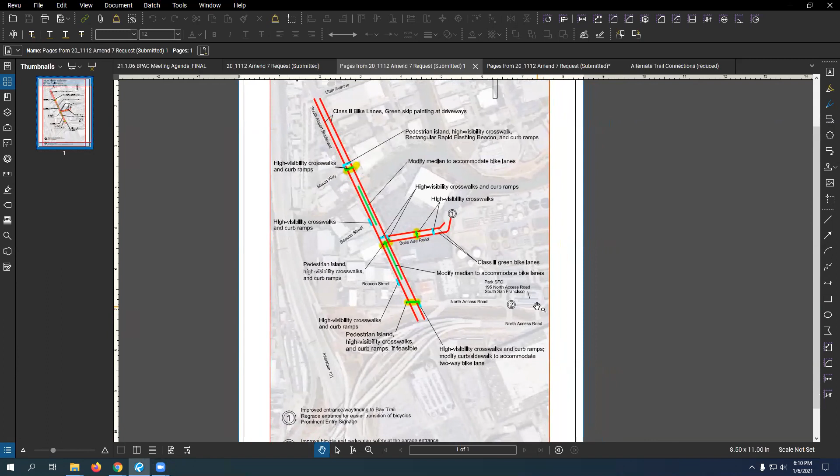The last project that I brought to BPAC was the North Access Road Bikeway project, and that was also part of that same BCDC permit. But this is the second phase of that BCDC permit where we're doing improvements along South Airport Boulevard.

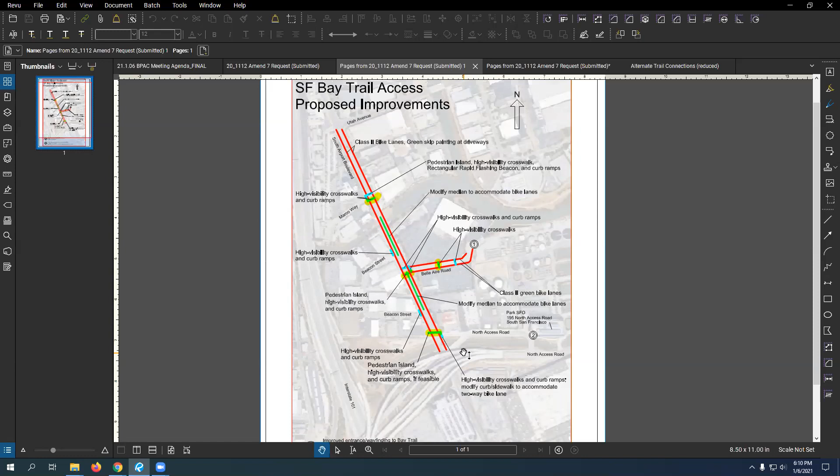I did bring these plans to BPAC previously, but BCDC wanted a formal letter from BPAC confirming that BPAC also agrees with the city's approach to the project. So I wanted to go over the letter BCDC sent us, and also a summary of what we were changing to the permit.

So the BCDC permit has a few improvements that they wanted to improve access from the city to the SF Bay Trail. That's really their goal, is to improve access to the SF Bay Trail, to get to the SF Bay Trail.

Here's my summary list, but just giving you an overview, here are the improvements that BCDC originally required the city to install. These dark red lines are bike lanes, and we've recently installed bike lanes on South Airport Boulevard, and Belle Aire already has bike lanes.

The other thing is, pretty much all the intersections, they wanted high visibility crosswalks, and maybe even new crosswalks. So there are a few locations where new crosswalks, the city didn't really think would be the safest idea to put in, or logical locations from our perspective that would still serve getting people to SF Bay Trail, either the one behind Costco or the one down by SFO, between SFO and the water treatment plant.

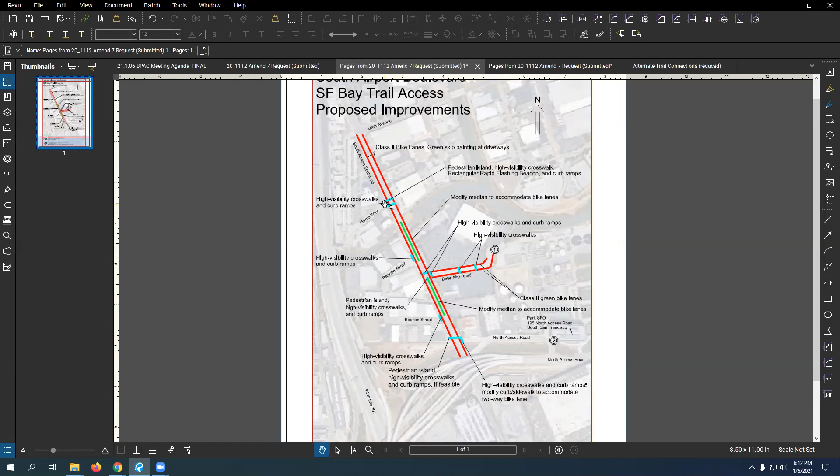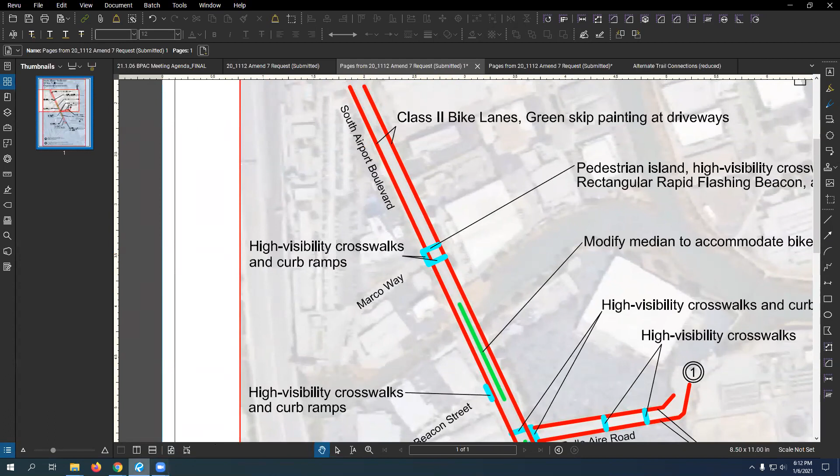So one of the ones we wanted to remove, starting from north to south, is at South Airport Boulevard and Marco Way. Right now there are 2 crosswalks there, and BCDC wants us to install 3.

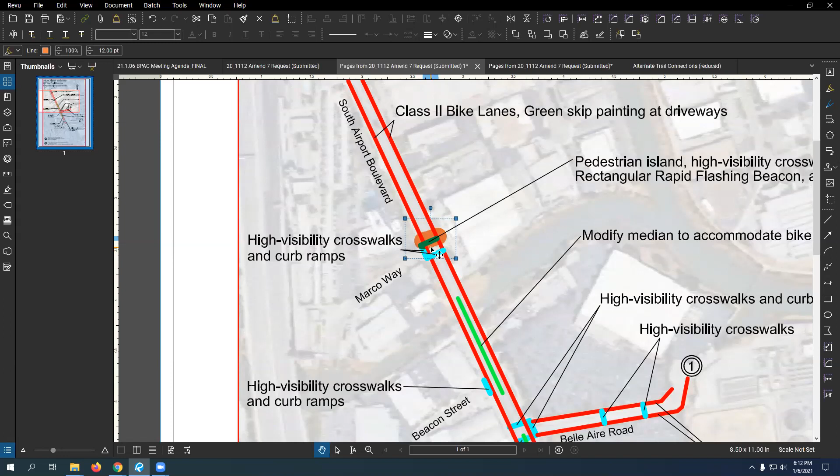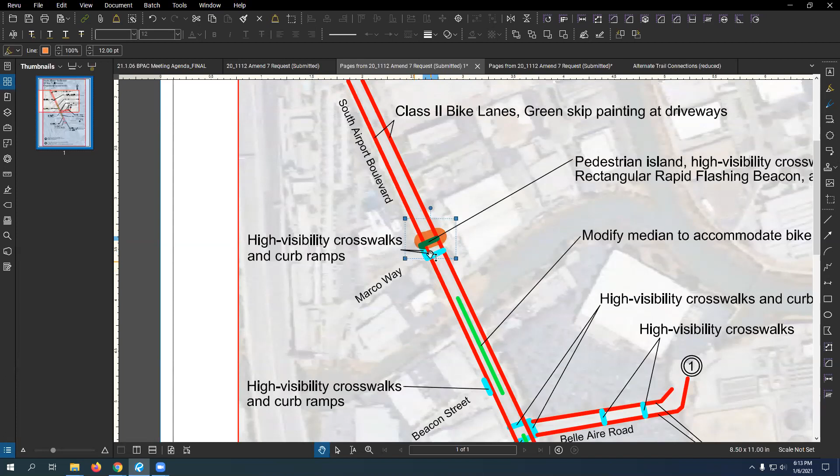Now, the reason the city doesn't want to install this top one is because it's an uncontrolled intersection, and drivers would have to worry about 2 places where pedestrians cross, and they can be distracted by more things. It's less safe for a pedestrian to cross when there are 2 uncontrolled crosswalks. I'm pretty sure everywhere else you've seen a mid-block crossing, there's always 1 crossing, not 2. So we've been trying to voice our opinion to BCDC that it's not very safe when you have 2 uncontrolled crosswalks right next to each other.

Now I'm going to show you what the plan looks like. So currently there's a crosswalk on Marco Way, and they just put in a high visibility crosswalk about last year on the South Airport Boulevard one. But what we're going to do...

Since we're not putting that crosswalk on the north anymore, we're going to put high visibility RRFBs, rectangular rapid flashing beacons, on either side. Right now it's just a crosswalk with regular signage, but this one will have the flashing beacons now. So that's the give and take with BCDC.

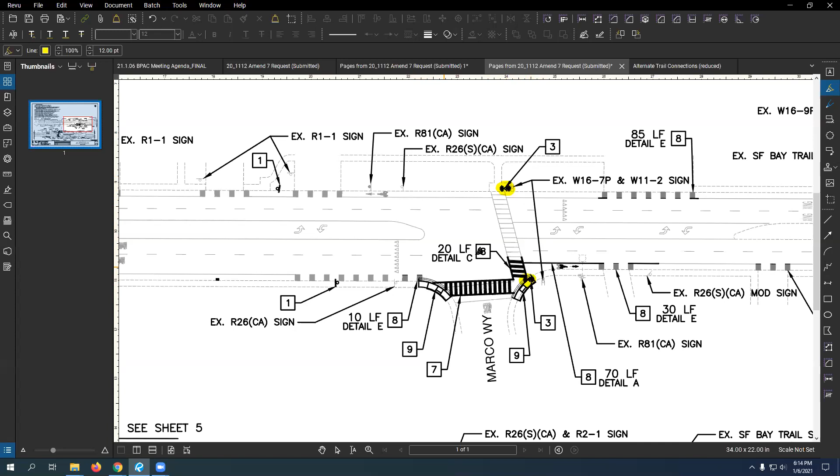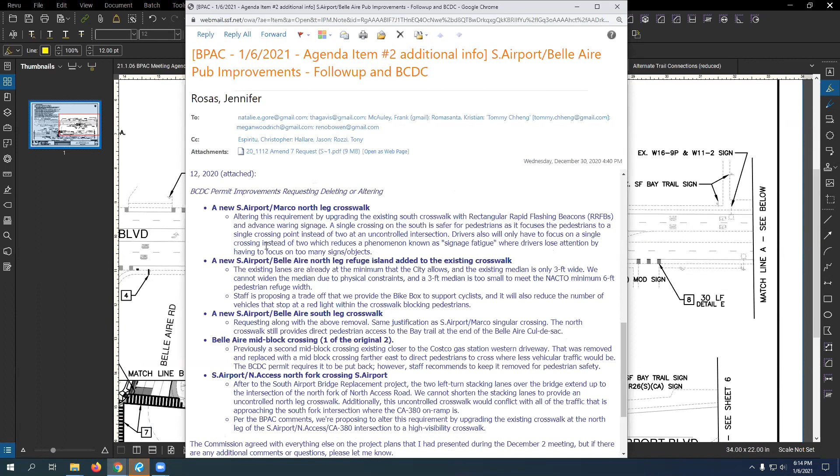The second one is we're going down to Belle Aire, where BCDC wants 3 legs of crosswalk at this intersection - a crosswalk on each approach and a pedestrian island on the south side.

So let me just show you an aerial view. Here's the intersection today. There's 2 crosswalks, pretty faded, not high visibility, and no crosswalk on the south side. Also there is this left turn, U-turn only lane that has been a pretty big concern.

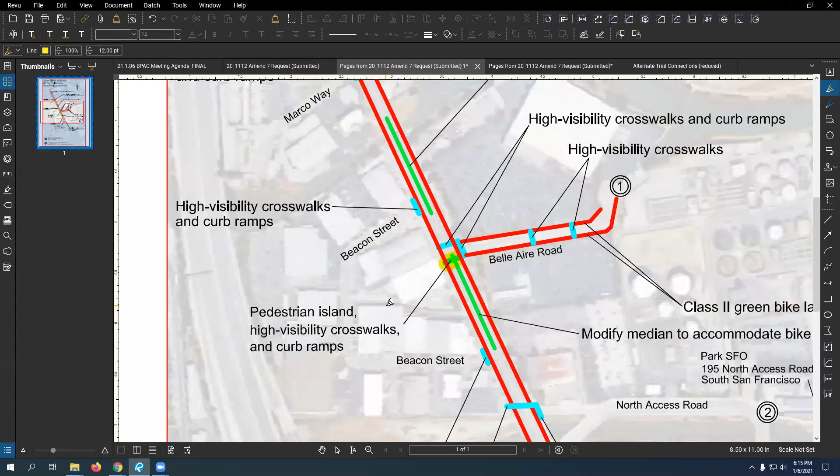So what the city is proposing is to not put in the south leg, for a similar concept. I know this is a controlled intersection now, but by removing the U-turn lane - there's not many cars, but a lot of Costco vehicles loading up at the gas station use that U-turn to get to the freeway.

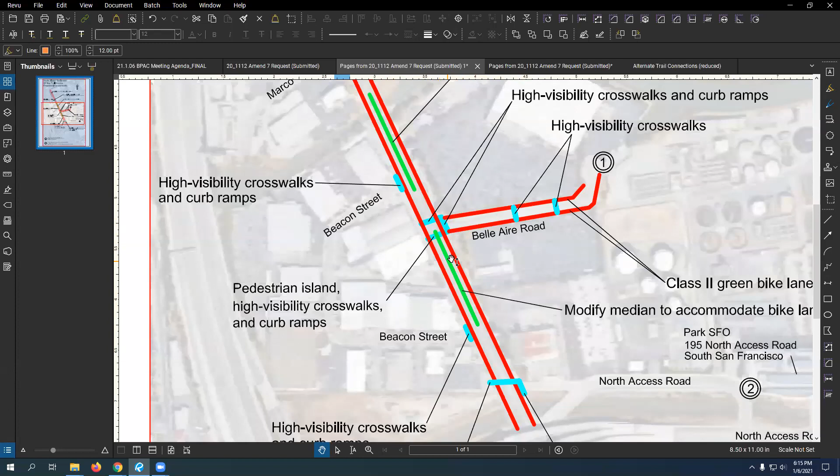So now they're going to be redirected to Belle Aire Road, and they're all going to be making left turns. By removing the U-turn lane here, we've got a lot more cars making left turns. And if we were to have pedestrians stack here to cross, now we've got left turns that might have to worry about pedestrians crossing.

Whereas if we still have the north crosswalk, pedestrians can stack there and still make their way to the SF Bay Trail, because Belle Aire Road is just a dead end road that leads its way to SF Bay Trail on either side.

The larger pedestrian generators for this area are the hotels to the north. There's really not a lot of pedestrian generation from here, but if there were, a large portion of the pedestrians come from the north side anyway. So this is still within their normal path of travel from our perspective.

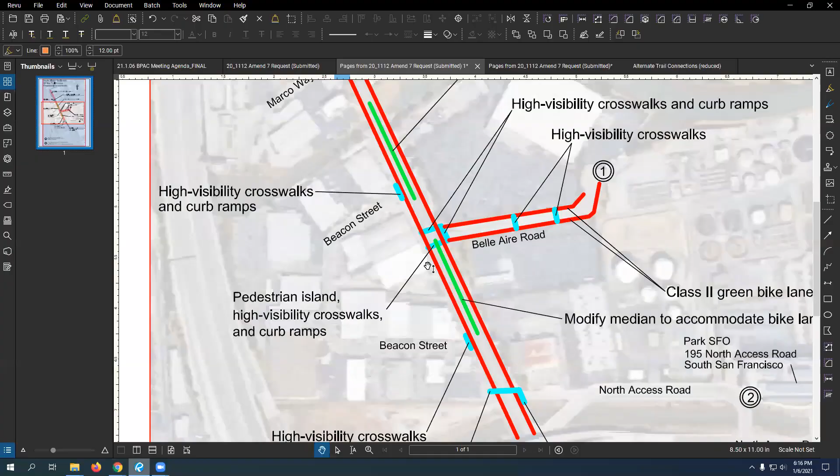So what we're removing here from BCDC's request is the south leg crosswalk and the south pedestrian island. And what we're going to give back, if that's the case, is we included the bike boxes on both sides. This is so bicyclists, if they want to make the left turns, they can get in front of the vehicles.

This is going to be setting cars back. It'll stop cars from approaching to the crosswalk, so that leaves a bright green box, what we call a bike box, for bicyclists to maneuver into and stack on the left side, or get ready to make their left turn. This puts them ahead of vehicles that are making a left turn.

Same concept coming out of Costco on Belle Aire, where everybody makes that left. They'll have a bike box so the bicyclists can get in front and make their way to the bike lane before vehicles can make their way over to South Airport Boulevard. So that's one of the givebacks.

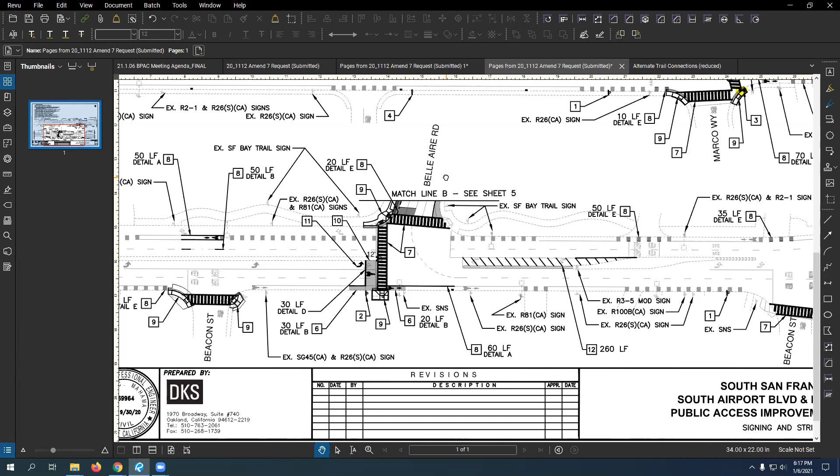And then the second one is that we're actually extending, you may not be able to see it super clearly, but here's the original curb line. It's hard to see. The original curb line is back here, this dashed line, and we're actually extending the curb out. It's not a true bulb out, but we are extending the curb out.

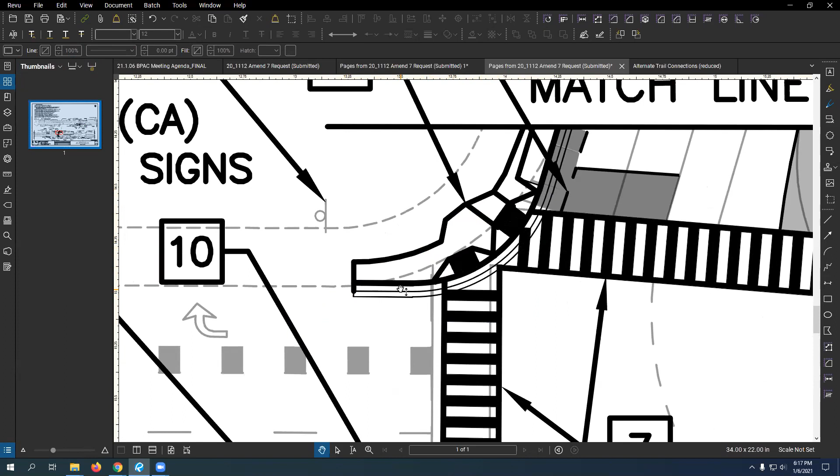It's reducing the curb, which makes the turn tighter, which makes vehicles slow down and not hit this corner as fast as they would be able to. It also gives basically more pedestrian area for them to take refuge if they're in this corner instead of being back here further away.

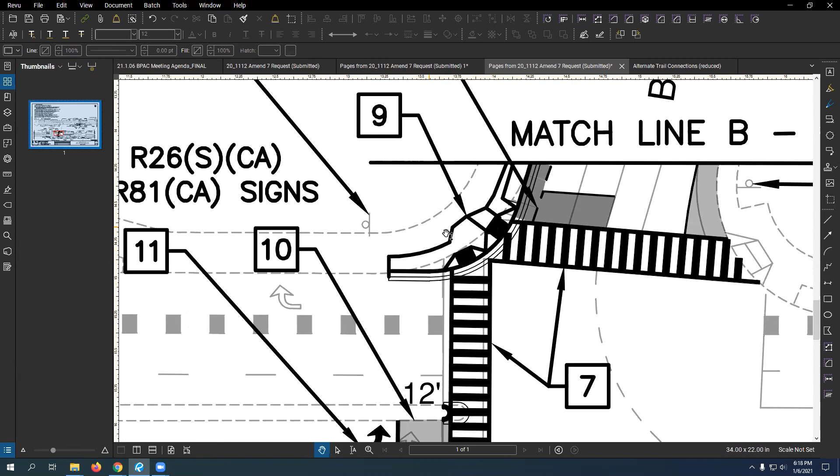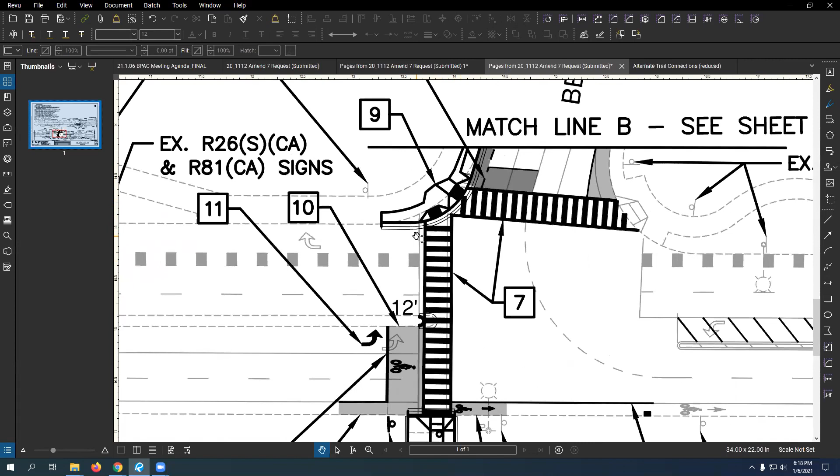It shortens the crosswalk, it shortens the crossing timing and everything like that. So the two givebacks that we have are bike boxes to improve bicyclist access, and the extended curb or tightened curb radius to extend pedestrian space, on top of removing the left turn U-turn lane.

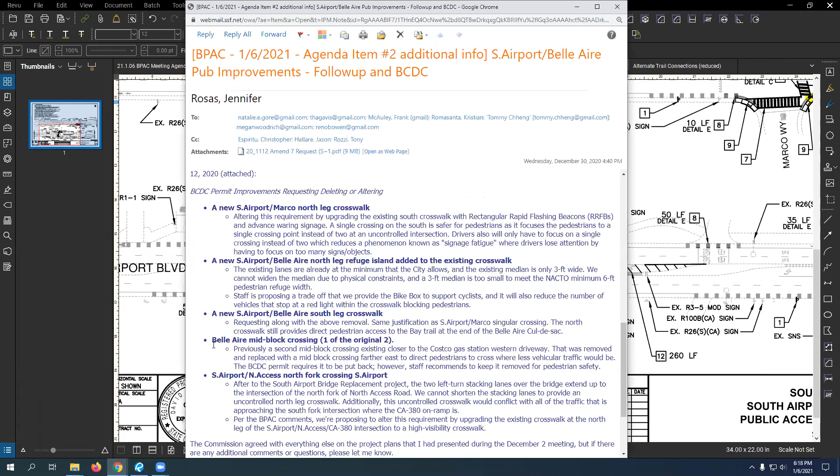And that is Belle Aire. Let's see. And the next one is Belle Aire mid-block crossing.

Now this one, you'll see it here on the aerial because it was there previously. But if you go down, if you've ever been down there and if you go to Street View, it's actually already been removed. This was because this is a very high traffic area, with a lot of Costco drivers coming in or going to the gas station, and it's very distracting to have a pedestrian cross there.

And as I previously said, you don't want two mid-block crossings because drivers are just going to be too distracted with all the signage and all the striping. You want to focus people where drivers can be focused on one place of concern. So this actually has already been removed.

So the city is saying it was justified as being removed. The other crosswalk was improved with high visibility striping, and it has crosswalk signage. So we were just asking BCDC, can we just remove this crosswalk, and we'll keep it as a single one.

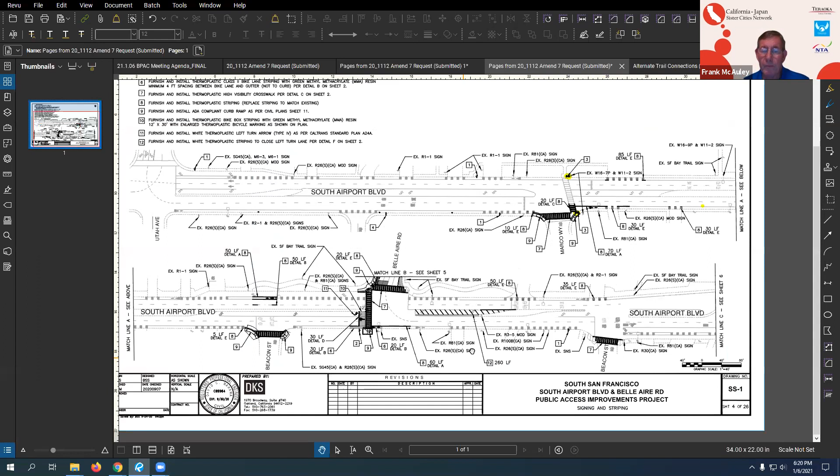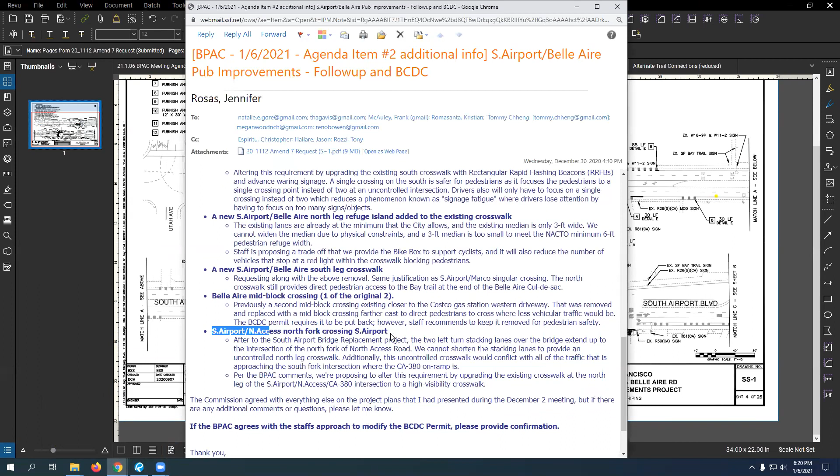Let me see if I can show that here. Oh no, it's not on this page. And then the final one is North Access Road and the North Access Road at South Airport crosswalk on the North Fork. So let me bring you down here. That's actually this intersection here, the North Fork of North Access Road reaching South Airport Boulevard.

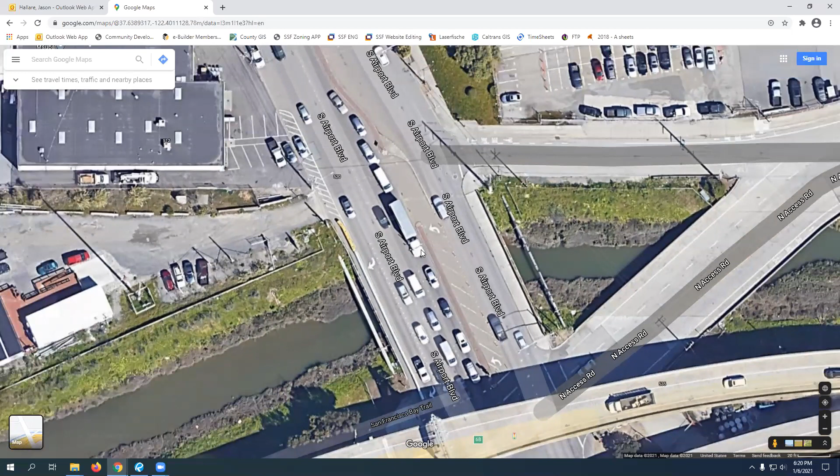So what BCDC wanted was a crosswalk. It only had shown one, but they wanted one crosswalk going across here to get to the other side of South Airport Boulevard. The difficulty here is that when they reconstructed South Airport Boulevard Bridge, there's a 2-lane left turn lane here that actually stacks up, though this aerial doesn't show it.

Oh, we can see it on Street View. There's a 2-lane left turn lane here that has stacked up past the intersection. So here's the intersection, and here's the 2-lane left turn stacking area. You can't have a crosswalk going through a left turn only stacking lane. So there's nowhere for us to put a crosswalk here.

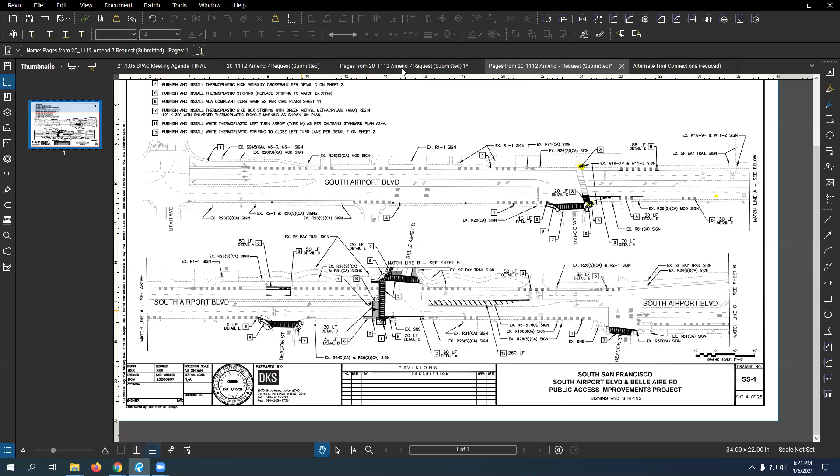So by removing that from the BCDC requirement, what we are going to give back is what was suggested, I believe, by the Vice Chair at the last meeting, which is the high visibility crosswalk on the South Fork of North Access Road.

So if I bring you over here, this is the South Fork and it's the North crosswalk. This was suggested previously to be a high visibility crosswalk to improve the crossing because you have bicyclists coming south, or if you wanted to have a pedestrian get across.

They were going to use this crosswalk anyway, but we're going to improve it to a high visibility crosswalk. I've already submitted the Caltrans permit for this because this is a Caltrans controlled intersection, and I already have Caltrans approval for that. So that's going to be part of our project.

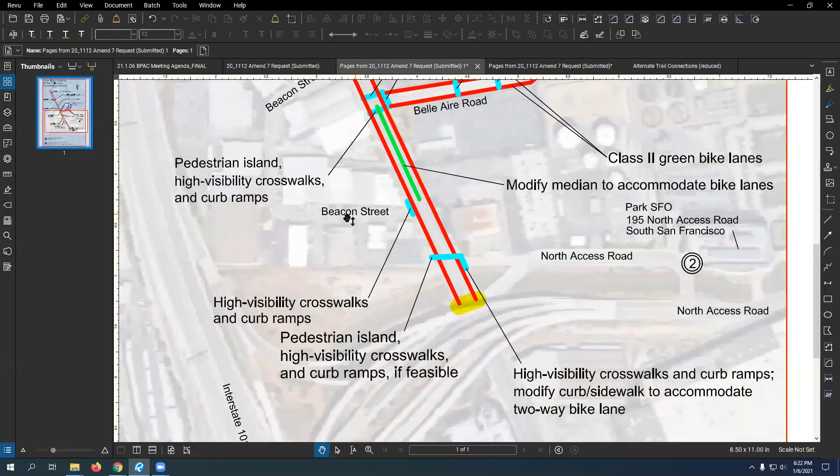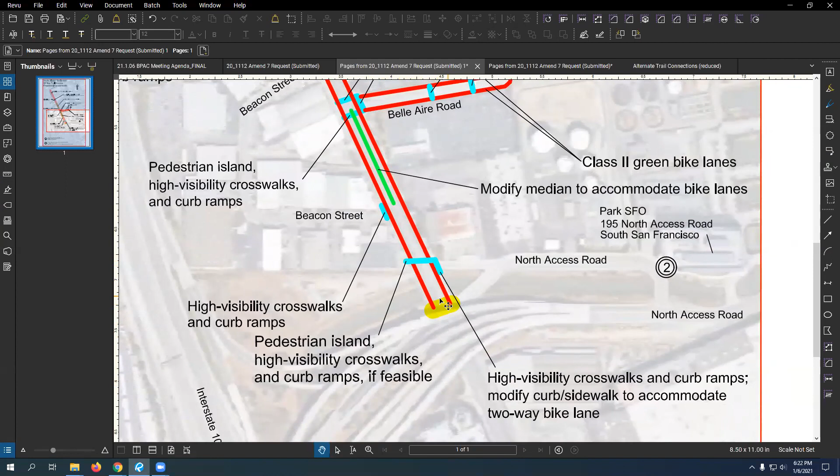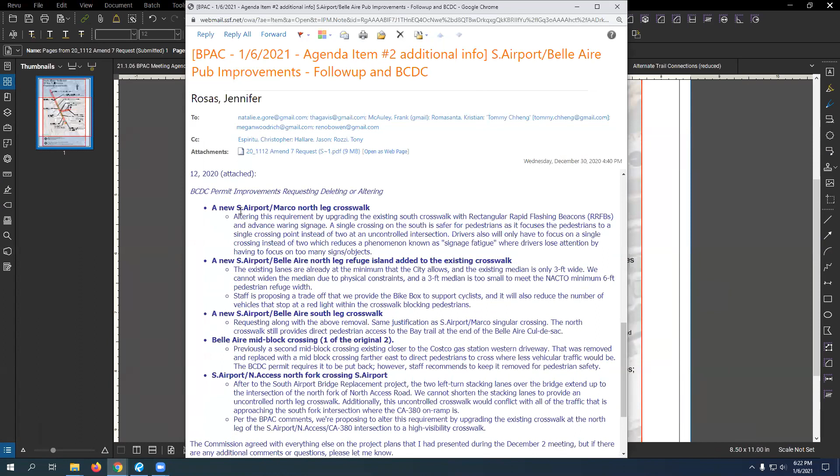But basically, there's the give and take. We're going to get rid of this requirement for a crosswalk here, pretty much because it's infeasible. And then we were going to improve the crosswalk down here at the North Access Road South Fork. And I believe that's all of the changes we were doing from the original BCDC permit to the proposed plans we have now.

Does anyone have a question, or were you able to review this letter from BCDC?

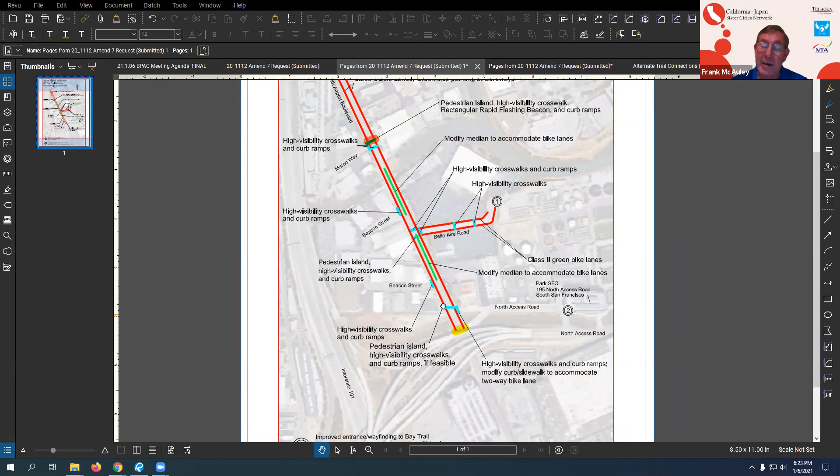I have a concern about the bike box. So I'm familiar with them back in Ireland, and when you're in a bike box, you can't park in it or you're going to get a nasty ticket, right? Which is fine. So hopefully we'll put some signage up here just at the beginning of the bike boxes, telling cars to stop short of that bike box. So I imagine it could be quite easy. But on Belle Aire Road, coming out of Belle Aire Road, but in the bike box there—

Again, in Ireland or Britain, you can't turn on a red light, but here you can. So if you're in the slow lane and you come up to that bike box and it's red, presently you could go through that bike box and turn. What do we plan to do in the future? Are we going to make them stop and wait for a green, or are we going to allow them to go through that bike box on a red light?

So for bike boxes here, the bicycle is going to be having to follow the same rules as a vehicle. They cannot cross when it's red. They can only cross with the protected green. So bicyclists won't be running reds. Oh, no, I agree.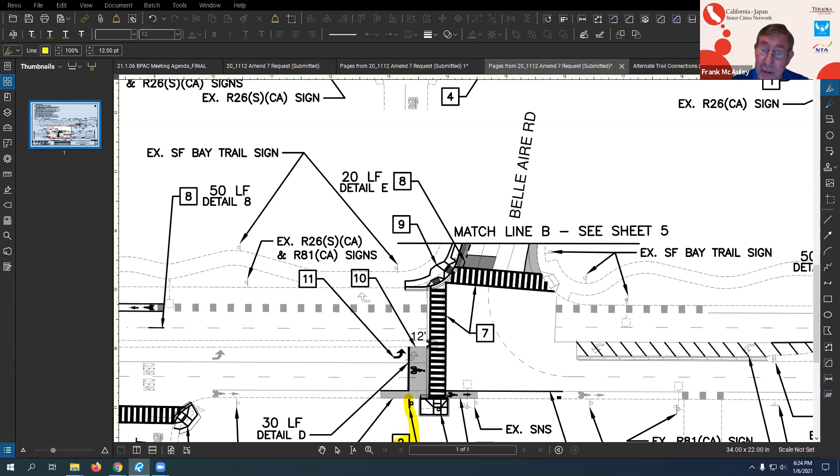But a car or a bicycle can come up to a red light and do a permissible right turn, right? Are you talking about if a car was coming out of Belle Aire Road, where it says 8 and 9? Like making 8 and 9, yeah, correct. Number 8. So if the bicycle's coming out there, we've got that arrow. I mean, if a car's coming out and hits that green box, and the light is red, he can go through. Well, currently he can go through, but we put the green box in—can he go through on a red light?

That's a good question. I believe they still can, as long as they're not blocked by a bicyclist waiting. The bike box is large, but the bicyclist really will be stacking on the left side, because the only purpose of the bike box is to make the left. Exactly. So therefore, I was thinking that maybe we don't need it on the full length of that right of way. We could just put it on the left turn lane and not on the through lane, and not allow the right turn cars to turn. Just a thought.

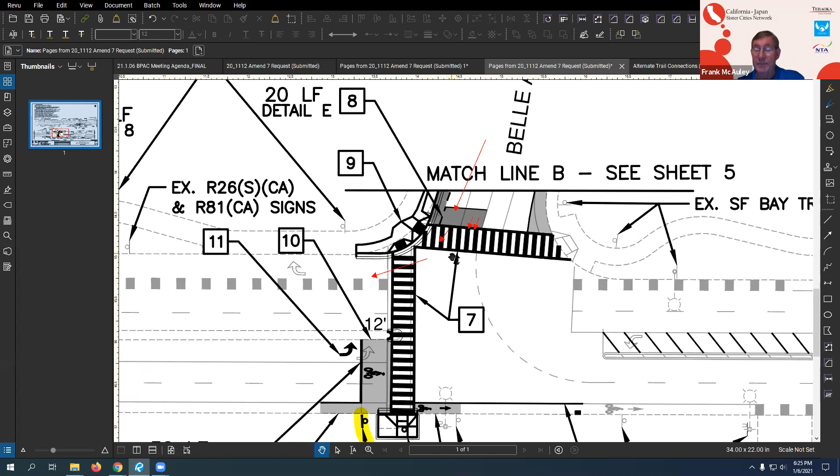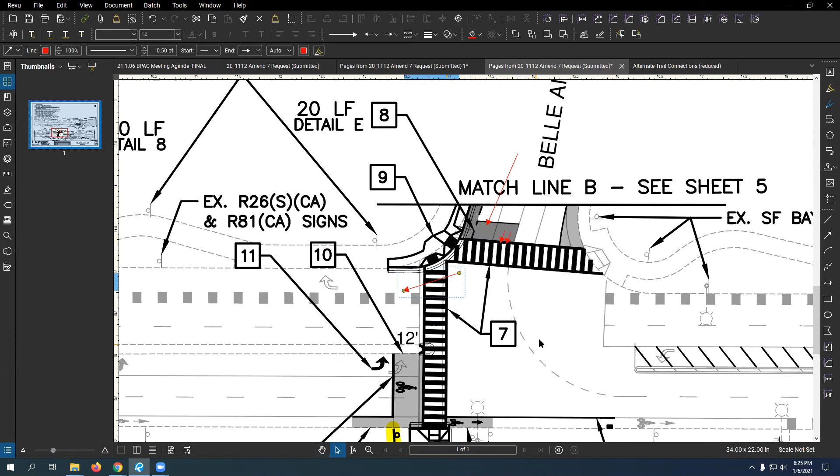Oh, I see. Yeah, the reason you paint the whole thing green is because a cyclist will come from the bike lane, and they still need to make their way over to the left side. So you paint the whole thing green to give this safe space for the bicyclist to make it over to the left. That's the point of that.

But we will have signage for the stop before the bike box and everything. Oh, there you go, note number 2. Gotcha. Yeah, a new sign to stop here before the bike box. Yeah, the learning curve is always something. Yeah, and we also will send out an info letter with the public relations officer to get out some information on bike boxes, because these are, as mentioned before, the first bike boxes in the city.

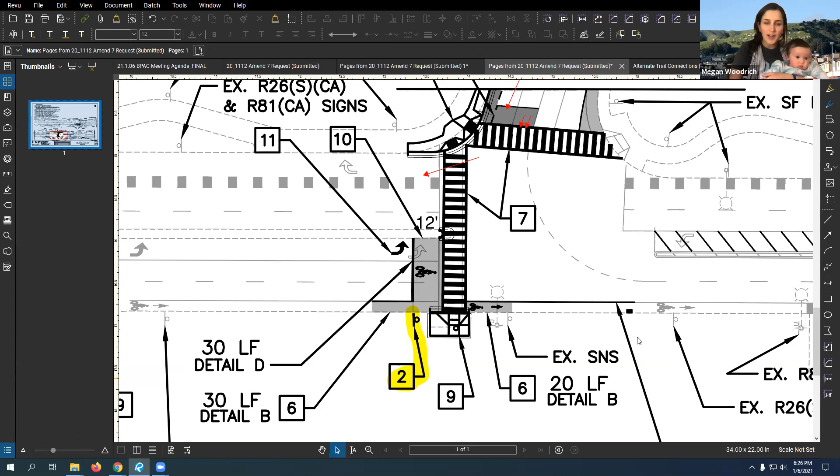I had a quick question. I'm wondering why there's not a bump out on the opposite side of Belle Aire Road to kind of mirror the bump out that you're doing, which I love.

But seems like there's space there perhaps for some more curb. Oh, I see what you're saying, extending the radius here. Yeah, you know what? We'll look at that.

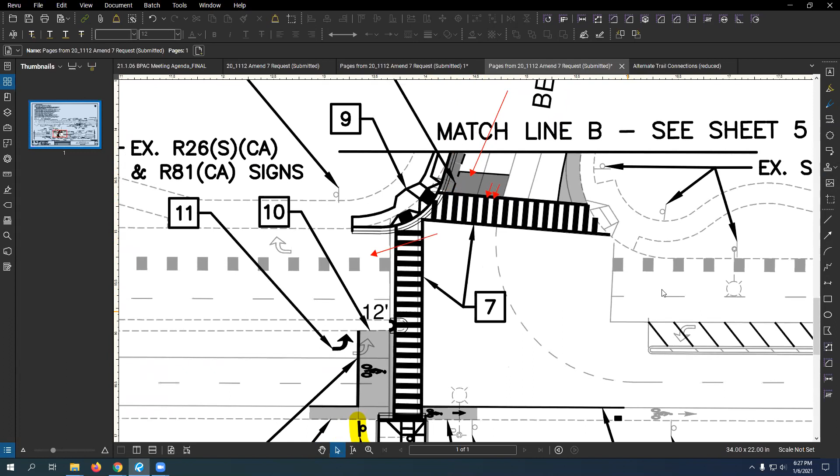For the opposite side here, there's a lot of large trucks that go to the water treatment plant, to Costco, and they have to make a certain radius to make it. For the right turn from Belle Aire to get to South Airport Boulevard, they can actually swing.

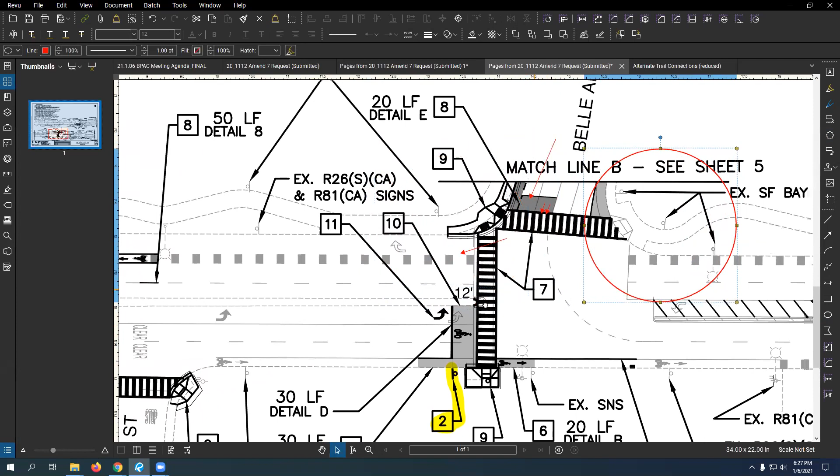Yeah, the trucks have a large radius, so they can swing all the way to the median. If you're just using this curve here, they can come from the right lane and overextend to the median to make this right turn. But over here on Belle Aire's side, there's not a lot of room from the median from the right turn lane.

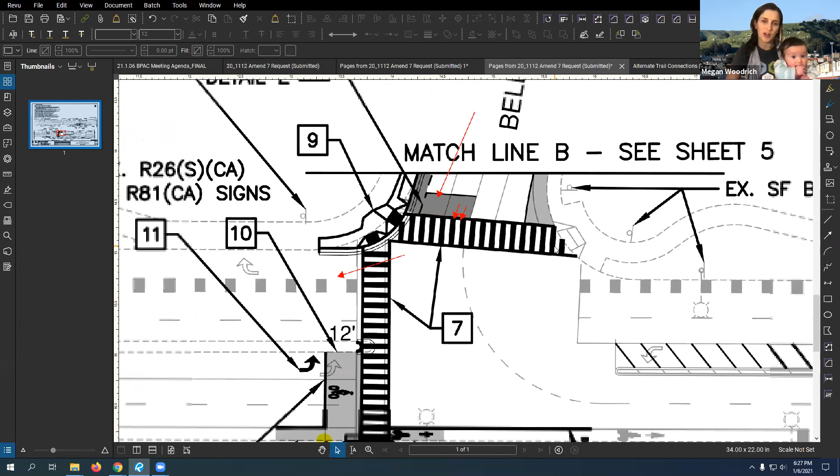So we can look at it and see if trucks won't be able to make the turn. But if they can make it while we tighten it up, then we'll look at tightening it up and extending the pedestrian zone here. On Belle Aire, there's no hard median. No, there's no hard median. Okay.

Yeah, you'll see that there's only one lane. Oh yeah, there's only a single lane, so the trucks, their sweep or their turn has to be a lot tighter here than if they were to extend over to the next lane. But on this side, trucks can make the right turn and sweep all the way around.

So for the large, big rigs, the right turn from Belle Aire to South Airport Boulevard is a lot easier than the right turn from South Airport to Belle Aire. Thank you for explaining that. But that's a good suggestion, we will look into that.

That's a good suggestion. Are the beacons that you're proposing to use for some of the crosswalks going to be the kind that flash red when someone's in the crosswalk? It'll be push button, similar to the ones that we have downtown, like on Grand Avenue. Oh, okay.

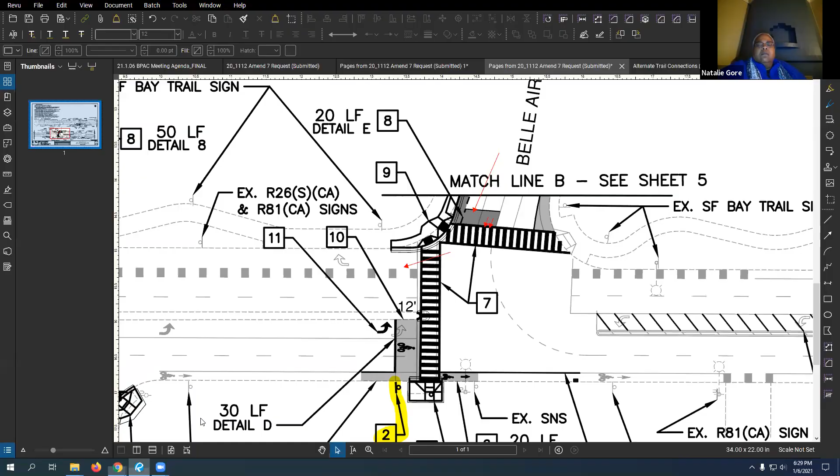Any other questions, or does BPAC agree with the city's approach? I don't see any issues that would hinder it from moving forward on my end. Having driven by there, it seems to fit. I like what Frank brought up, and I'm glad Frank asked that question about the right turn, because that was the first thing that popped into my mind too, since I always go to that Costco, so I was wondering how that would work out.

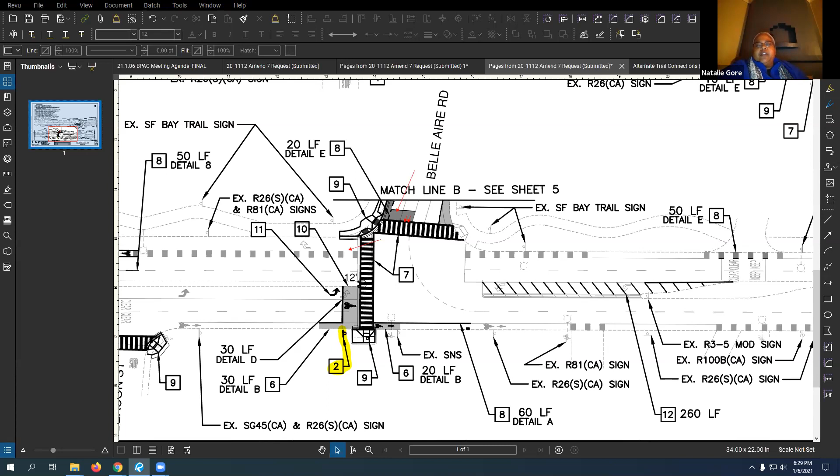Chairperson Thagavis, could we take a vote on it just to make it official? Yes. Sure, does any- I'll go ahead and do the roll call for the vote. Chairperson Thagavis, yes, can I get a roll call, can we do a roll call vote for the letter? It's a letter that we have to send in, right? Yes, actually, let me double check this. So Jason, what do you need, a BPAC letter of support like we've done for other projects too, or?

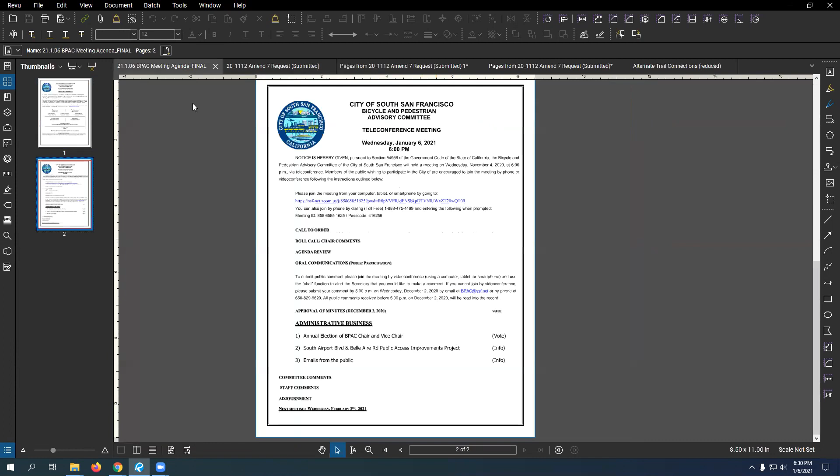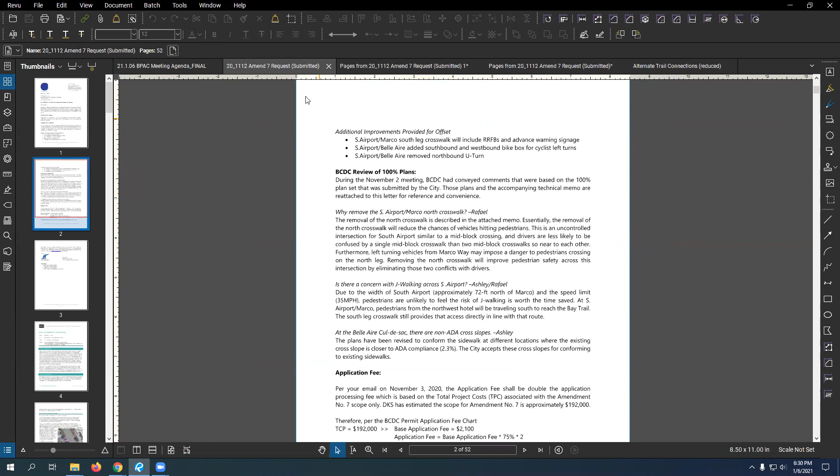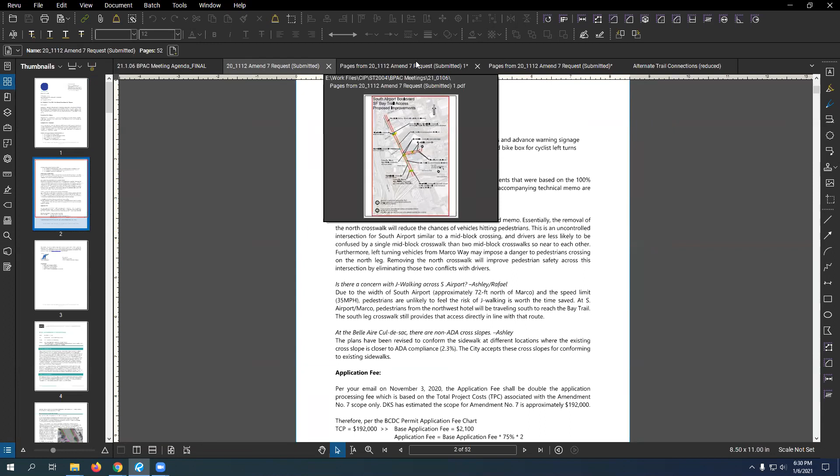Yes, it would be pretty much a BPAC letter of support. You could also reference the letter that BCDC had sent us, which requested basically confirmation that BPAC had reviewed our plans and the changes to the BCDC permit and has no objection. So tonight I presented the changes that we're proposing to the BCDC permit, and if BPAC votes to agree with it, I think that would be sufficient proof. Okay, so let's do that.

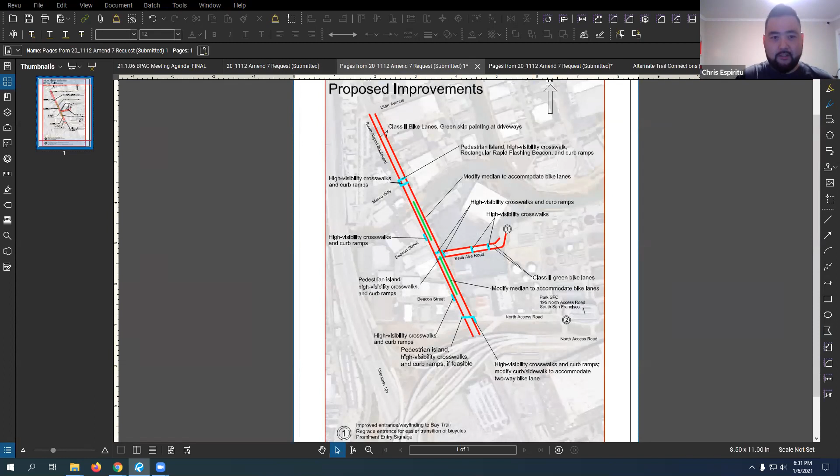Chairperson Thagavis, let's take a roll call on BPAC's proposals as described tonight, and then we'll come up with a letter of support for this project, get it signed by you, and send it off to Jason. Okay, sounds good. So let's take a roll call. Okay, all those in favor?

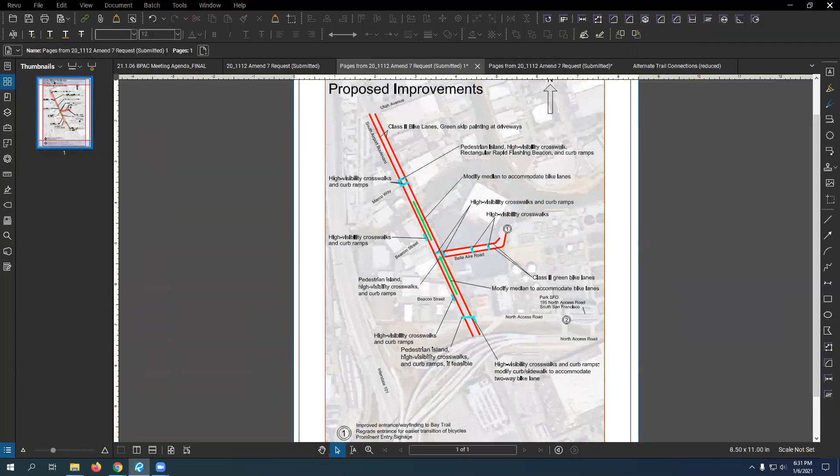Let's have Jen go one at a time, just for clarity. Oh, I'll go, sorry. That's all right, it's my first one, Natalie. I'm gonna have to touch base with you. I know, you're doing a great job.

Okay, let's start with the first committee member. Gore, present, aye. Chairperson Thagavis, aye. Vice Chair McCully, aye. Chairperson Chang, aye, and Chairperson Woodrich, aye. Chairpersons Anderson and Bowen are absent. Thank you.